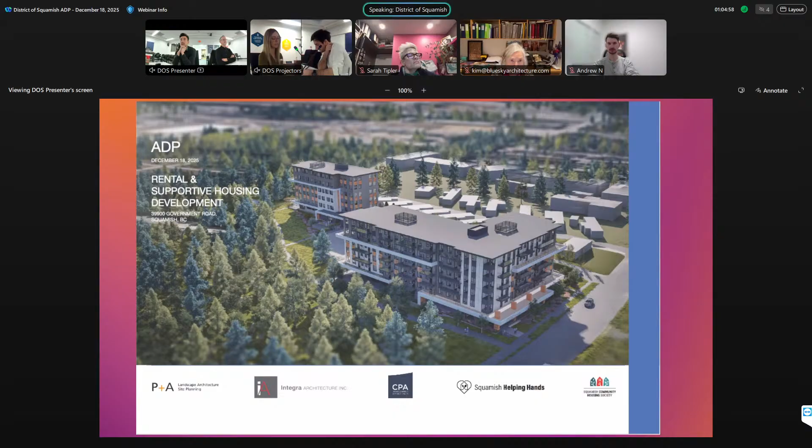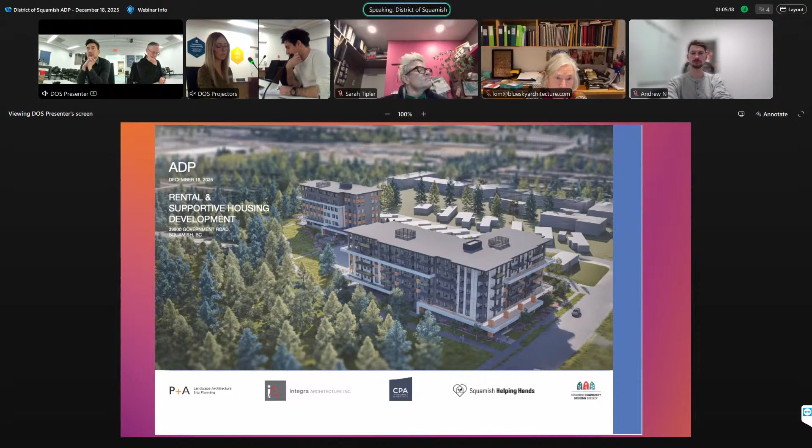The proposal is for two six-story buildings, including an affordable housing building to the north fronting Government Road, and a supportive housing building to the south fronting the future Pioneer Way Road extension. In the interim, a multi-use path is proposed along the eastern side of the development.

The supportive housing building is classified as institutional and is exempt from the form and character development permit requirements. However, the district encourages the applicant to apply relevant design guidelines where appropriate.

Staff are generally supportive of the proposal and are seeking ADP's feedback on building form and character and landscaping, with particular attention to pedestrian circulation and landscaping within the parking areas, also the southern elevation of the affordable housing building in anticipation of the future Pioneer Way extension.

Given the nature of this affordable and supportive housing project, staff asked the panel to consider costs in any design recommendations. This application qualifies for an expedited review process requiring only one ADP review, after which staff will work with the applicant to resolve any outstanding issues. With that, I'll turn it over to the architect team for their presentation.

Great, thank you Robyn. Good afternoon everyone. My name is Colin Trong, I'm principal architect at Integra Architecture. It's a privilege for me to present this project to everyone this afternoon. It's a wonderful project in our opinion.

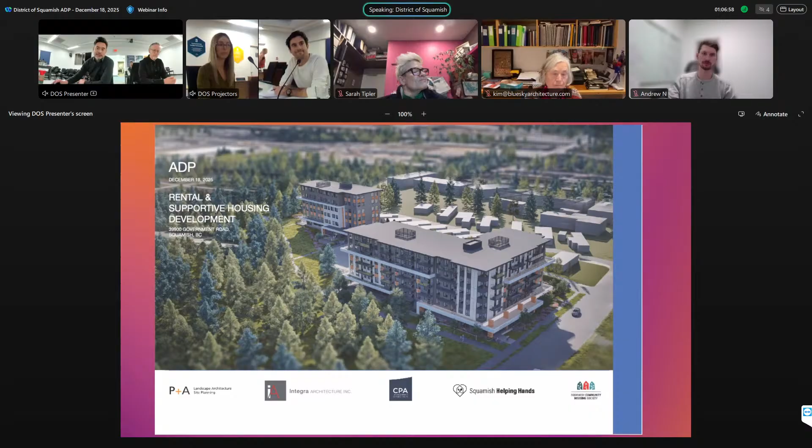I'd like to introduce our project team who's also here with us this afternoon. We have CPA development consultants. Lindsay Fraser is directly behind me as well to answer any questions on behalf of our housing partners, Squamish Helping Hands and Squamish Community Housing Society. And to my left is Michael Patterson from P+A Associates, our landscape architect, who I'll hand the presentation over to after we finish the architectural portion.

So this is our subject site here, highlighted in red. It's located within the North Yards neighborhood. This property will remain as district-owned land with BC Housing as the operator, as Robyn previously mentioned. The site is irregularly shaped and contains a decommissioned section of Highway 99 that runs north-south between Government Road and Pioneer Way.

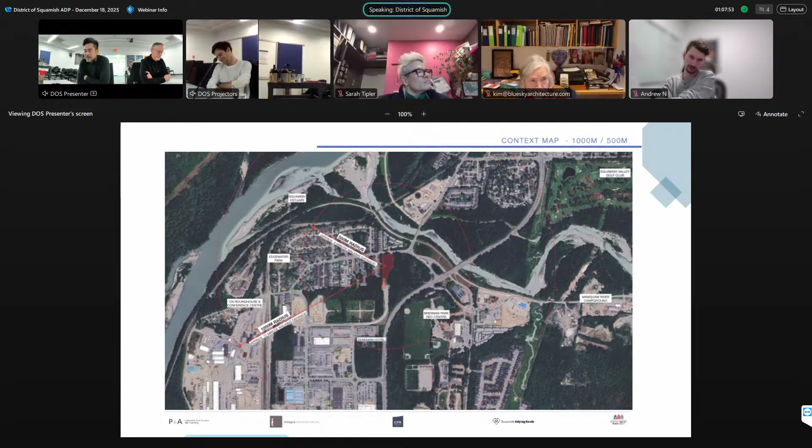The site is well connected with public transit and bike routes along Government Road and within walking distance of local businesses and recreational facilities. To the north, there are townhomes and single-family residences. On the west, there's a mobile home park. The east and south sides are undeveloped land.

Here are the street view images of the property along Government Road on the right-hand side.

Our development proposes the construction of two buildings. The affordable rental building is arranged in an L-shaped form at the northeast corner of the site, establishing a strong street presence, while the supportive housing building is located at the south end of the site and is accessed by a driveway off Government Road. Both buildings' siting has been determined by their programming requirements, also for optimization of solar exposure and to minimize flood risk impacts to neighboring properties.

95 surface parking spaces are provided at grade, including loading areas and service access. We have also highlighted the future road, Pioneer Way, on the right-hand side, which is subject to district acquisition from the Crown. Our understanding is this road will not be built in the foreseeable future, therefore it is not considered in the site planning concept. However, a multi-use path is proposed along the east side to provide a connection from the south end to Government Road.

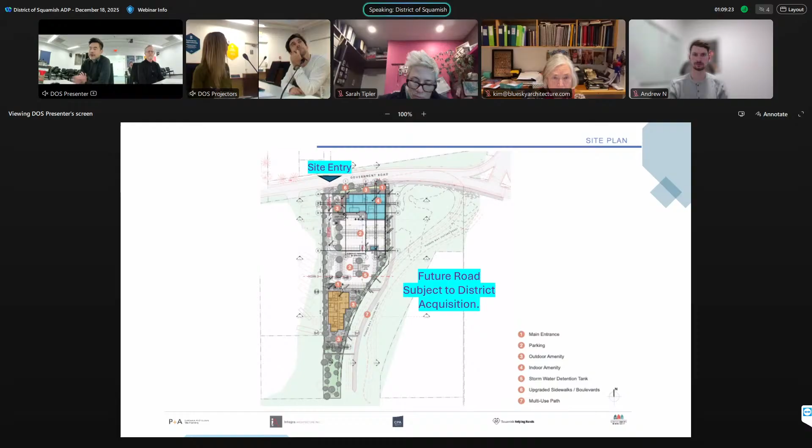These are the site challenges for this development. A flood hazard assessment report was required and completed. The development has been designed to maintain flood conveyance capacity and avoid increasing flood risk to adjacent or upstream properties. The minimum flood control level was established, and all building service rooms are located on the ground floor.

The site is also within the wildfire hazard area, which influenced our choice in non-combustible building materials and the implementation of a fire priority zone for landscaping to reduce wildfire risk, helping to protect people, property, and structures.

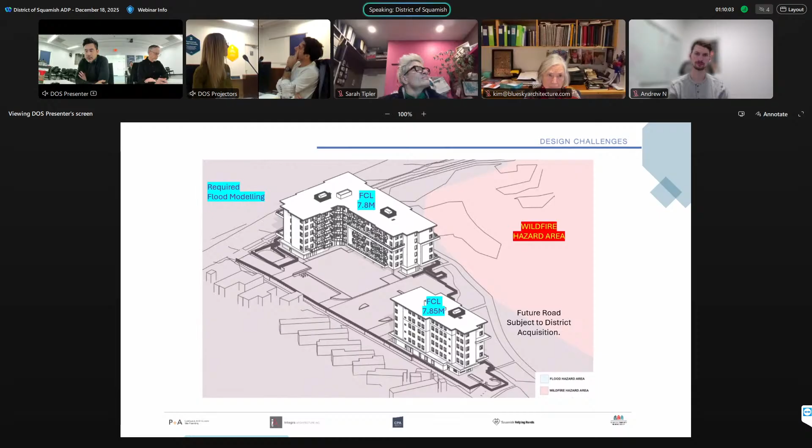At the north end of the site, the affordable housing building lobby is oriented towards Government Road. The interior amenity space is located adjacent to the main lobby and has direct access to the covered outdoor space. A path leads to the kids' play area on the left that provides further amenity space for residents.

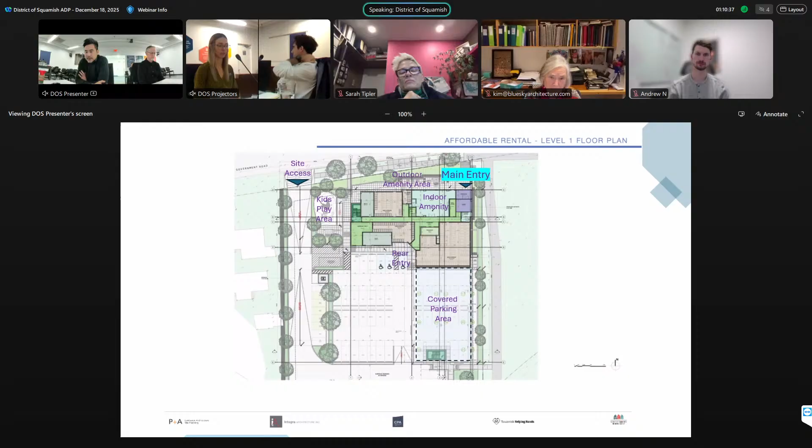A secondary building entry is provided on the south side of this building, providing access from the surface parking area. Accessible paths of travel are provided to the building from Government Road to the north and from the surface parking lot.

Residential units are located on levels 2 through 6 and are serviced by 2 central elevators. The L-shaped form of the building allows for ample natural light while maximizing the building's efficiency. Reducing undulations contributes to the building's envelope performance and energy targets.

Overall, there's 100 residences, 20 units per floor. 20 units, which is 20%, are adaptable, and 5 units, 5%, are fully accessible for the overall building.

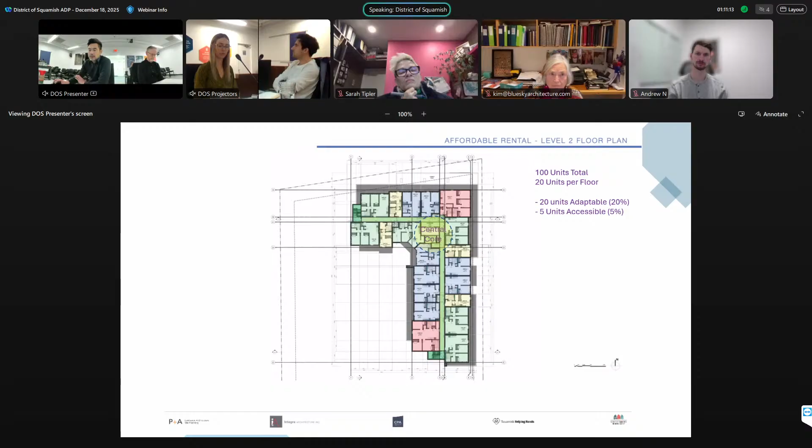Here are select examples of unit plans. All units are designed to meet BC housing standards, ensuring efficiency, livability, meeting adaptability and accessibility as required.

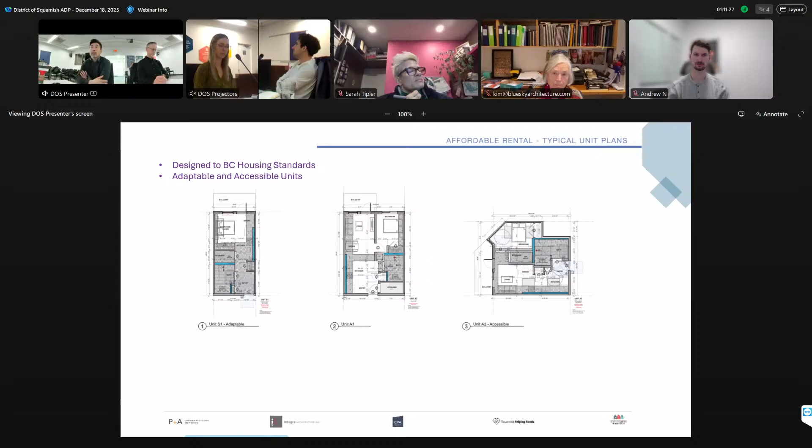At the south end of the site, the supportive housing building is oriented with its main entry facing north, towards a parking area. Program support spaces and services are provided throughout the main floor.

2 outdoor amenity areas are proposed. One is adjacent to the dining hall, which is the top right, and another south of the multi-purpose room, which is on the bottom side, provides an abundance of natural lighting and southern exposure with outdoor programs uses.

We have worked extensively with Helping Hands Society to determine programming requirements and meeting their objectives in conjunction with the support of BC Housing.

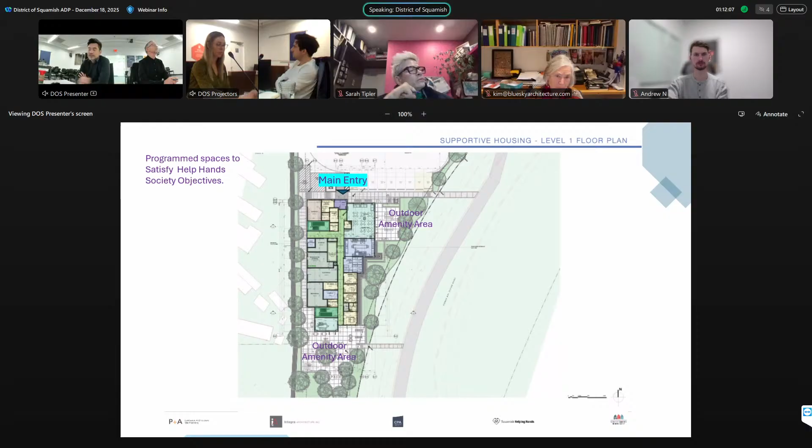The residential units are located on levels 2 through 6 and are wrapped around 2 central elevators. There are 65 residences in total, 13 units per floor, all designed to be 100% adaptable, and 2 units per floor will be fully accessible.

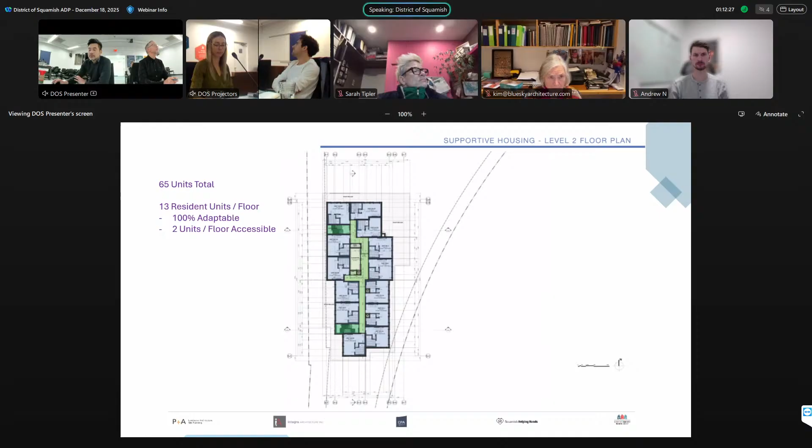Our development complies with the DPA3 by incorporating modern architectural design that harmonizes with the natural surroundings. These precedent images of existing buildings in Squamish provides us with the inspiration in the design of the proposed development.

Here you can see framed element features, the use of materials such as cementitious lap siding, cementitious panels, and corrugated metal siding provides visual interest and a varied building expression. Wood-looking materials provides warmth that harmonizes with its natural setting.

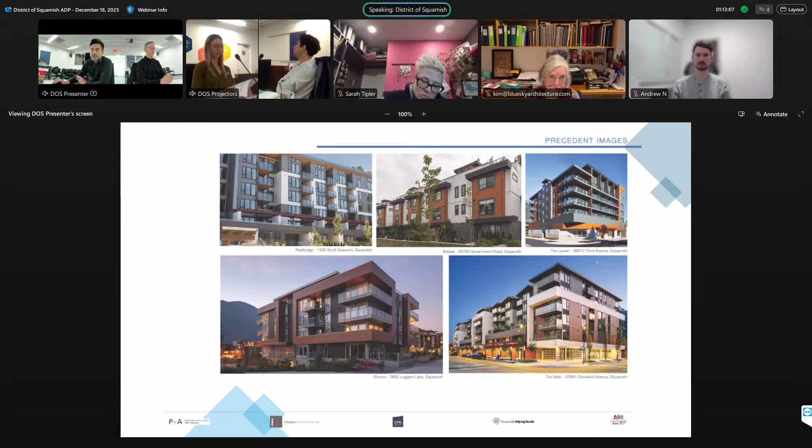The architectural design proposed is a contemporary architectural character that blends urban form with surrounding natural landscape. The design draws from both modern and West Coast influences, complementing the existing diversity of the streetscape.

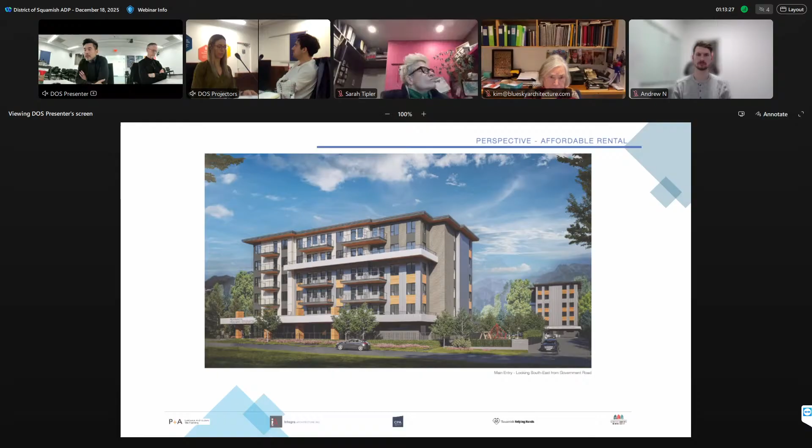The building massings are articulated through material variation and a contemporary color palette, accented by warm cedar wood look soffits and accents. Fiber cement panels and cedar wood look accents highlight the building's form, while generous glazing allows for ample natural light. These elements establish rhythm and visual interest across the facade.

Large roof overhangs with strong lines provide both weather protection and solar shading, while an extended canopy on the north facade emphasizes and anchors the main entrance.

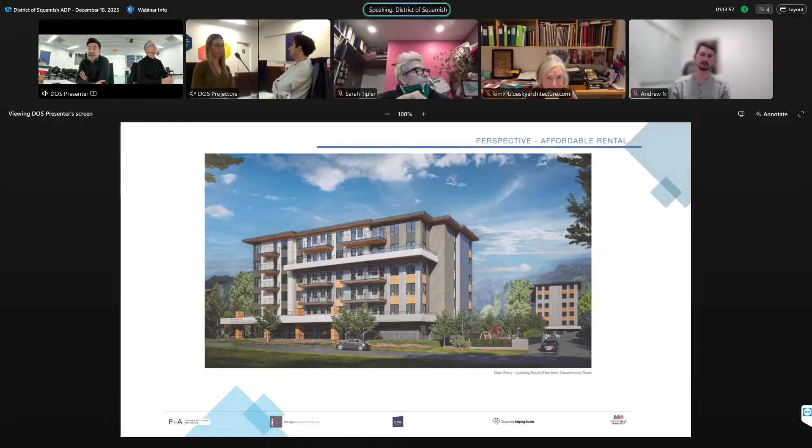The supportive housing design maintains a similar material and color palette. However, the different building form and the creative selection of materials and accent locations changes the feel and rhythm of the architectural expression, which gives this building its own identity.

Similarly, an extended canopy on the north facade creates a strong main entrance element.

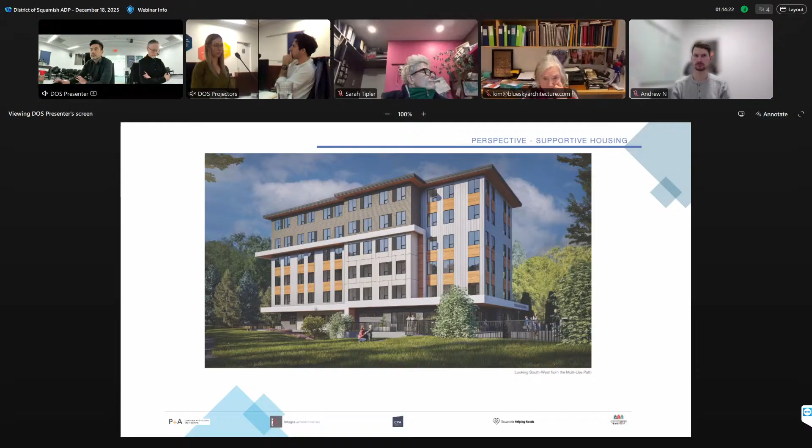The exterior building materials are high quality, durable, and non-combustible per the requirements for buildings located within a wildfire hazard area. Materials include fiber cement panels, siding with a wood look finish, brick masonry, and corrugated metal siding.

The building's massings are articulated through material variation and a contemporary color palette of white, grays, beige, black, and by warm cedar wood look soffits and accent panels. Elegant brick masonry provides a durable cladding material that distinguishes the ground floor.

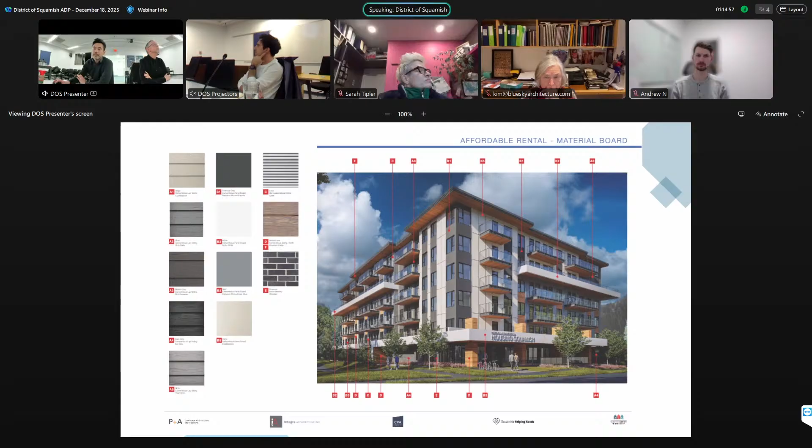The supportive housing exterior building materials proposed are similar to the affordable rental building to provide a homogeneous development.

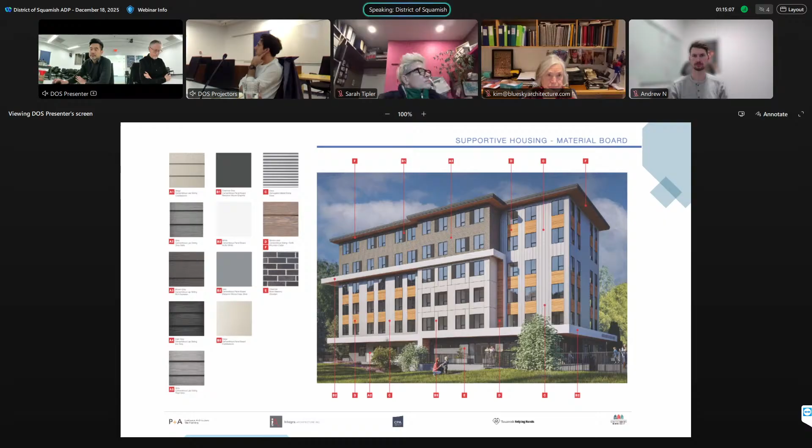The next few slides show the building's elevations. Though indicated flat as an image, at a human scale, buildings are not viewed directly flat or as an overall perception. These images present the building's massing, articulation, and material selections.

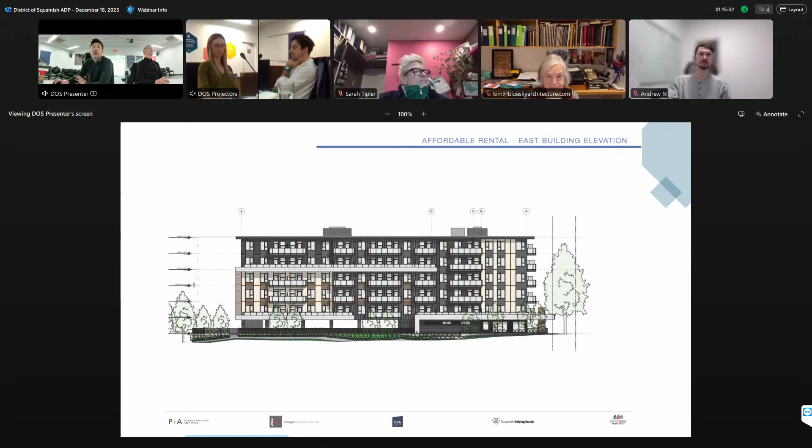This is the east elevation for the affordable rental building here. In the west elevation, this is the supportive housing east elevation. And this is the west elevation of the supportive housing.

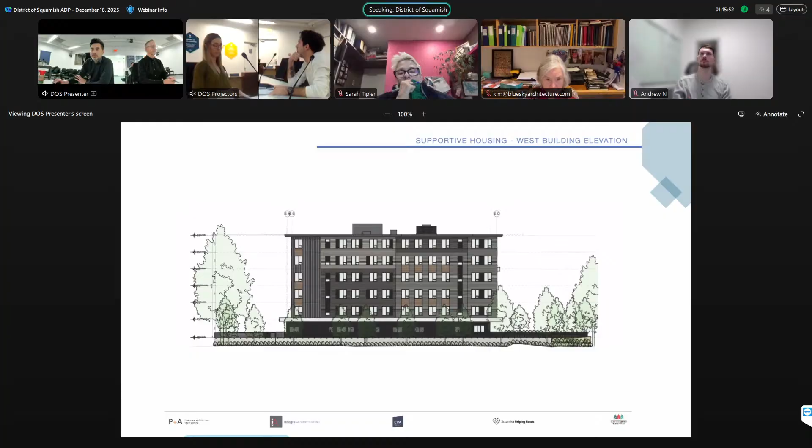Our development will be designed in accordance with the BC Energy Step Code Level 3 for the affordable rental building and Level 4 for the supportive housing. The ownership team is committed to designing, building, and operating buildings that provide healthy, comfortable living environments while being highly efficient in water use, reducing emissions, and minimizing environmental impacts.

Through the design process, we will optimize the building design to ensure energy efficiency. Sustainable strategies include high-performance envelope systems, recycled content of building materials, low VOC interior finishes, waste diversion, parking spaces pre-wired for EV charging, as well as high energy efficient appliances and fixtures will be considered.

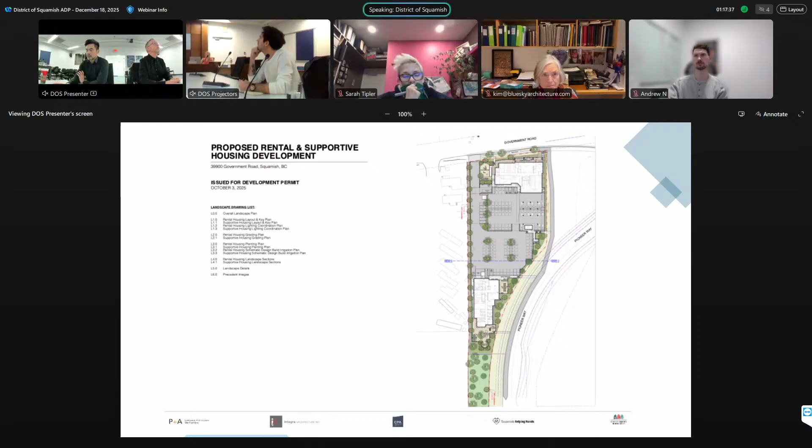Next slide. So as we focus on the affordable housing project, you can see that to the left is the vehicular entry to the parking area for both projects. The lobby entry is to the east, to the right, on the north side for the affordable housing.

We have a covered area of outdoor amenity landscape that is linked to the interior amenity landscape, and that access to the west to an area for kind of a communal area, both incorporating a children's play, but also a covered outdoor pavilion and a seating opportunity for parents or seniors to be outside and participate in a sort of group area.

We do have Class B parking provided that meets the requirements. And just to the south of the building on the east side, you can see that we've also provided a separate pavilion. The intent there is to have an outdoor space that would be separated from the building, a place where people could go and have a covered space in the landscape and would be able to smoke in that area.

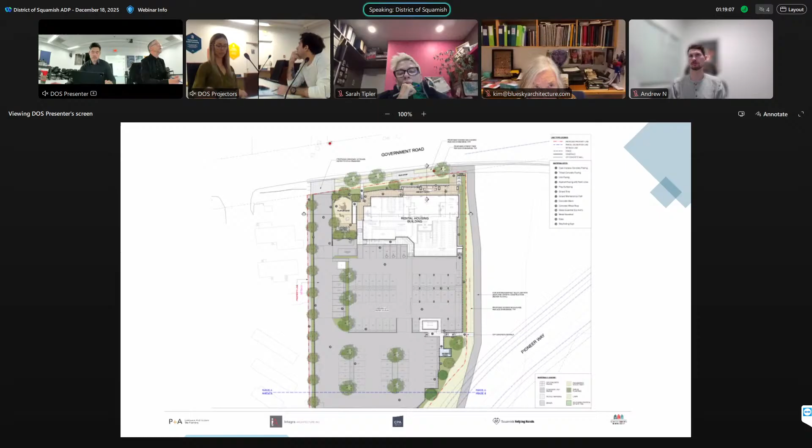The parking area, we have planted trees, and you can see along the west boundary that we have trees going down on the west side to provide a buffer and transition to the neighboring project. Next slide.

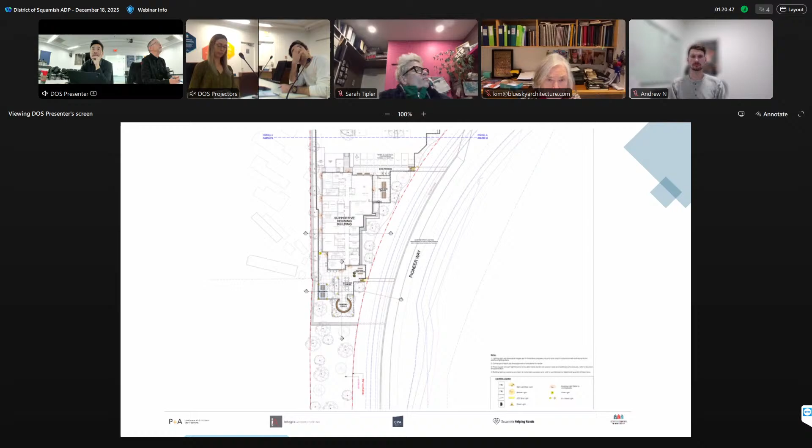Next slide. Similarly, on the supportive housing project, we have lighting to make sure that everything is secure and safe and visible for resident use for nighttime usage. Next slide, please.

The planting plan is part of the FireSmart area, so we've been working with the FireSmart principles to make sure we've got conifers more than the required distance away from the building. Primarily it's a deciduous landscape with broad-leafed evergreens. FireSmart is always a bit difficult to interpret with particular species, but I think we've done our best.

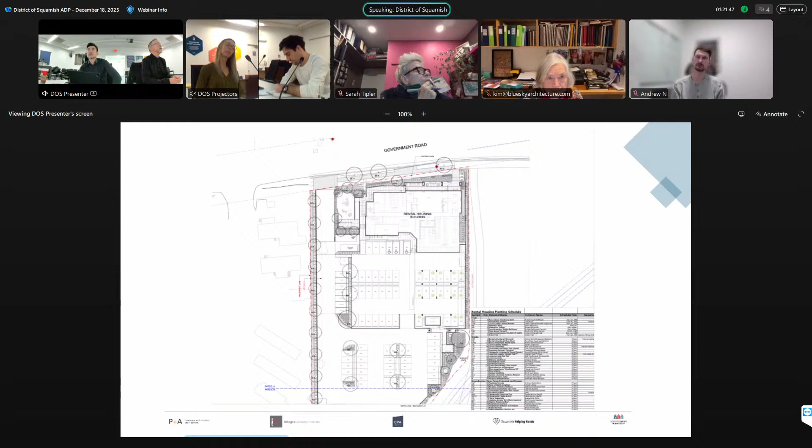It's fairly drought tolerant, and we will be providing an irrigation system for establishment and maintenance. We've tried to buffer the landscape around the buildings with a nice rich landscape cover, providing variety of seasonal interest and other aesthetic reasons.

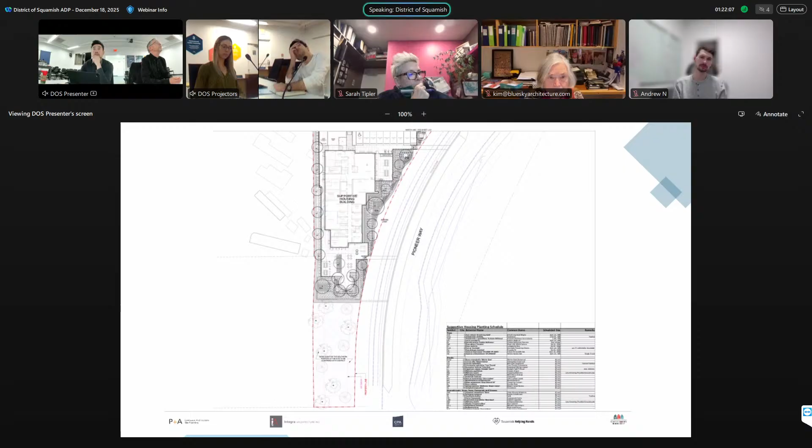Next slide. Similarly, for the supportive housing, you can see again that we've got a fair amount of planting landscape for people to look out on and to enclose the project. Next slide. This is just showing that we have irrigated the plan, so I won't spend much time, just wanted to bring this up to indicate that it is irrigated. Next slide is the supportive housing building, which again would be irrigated.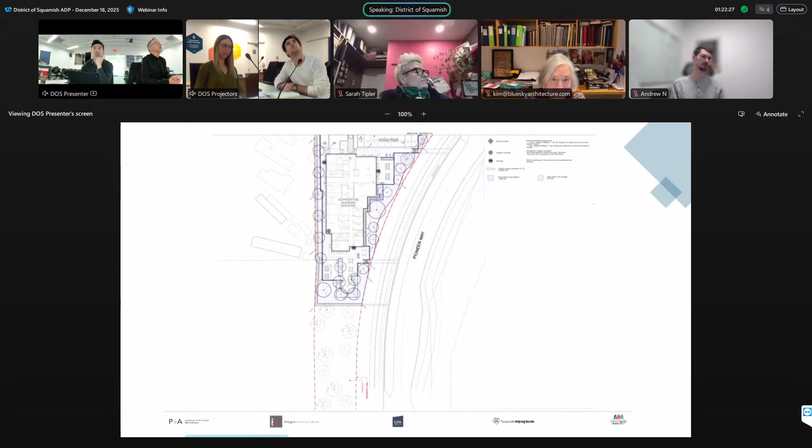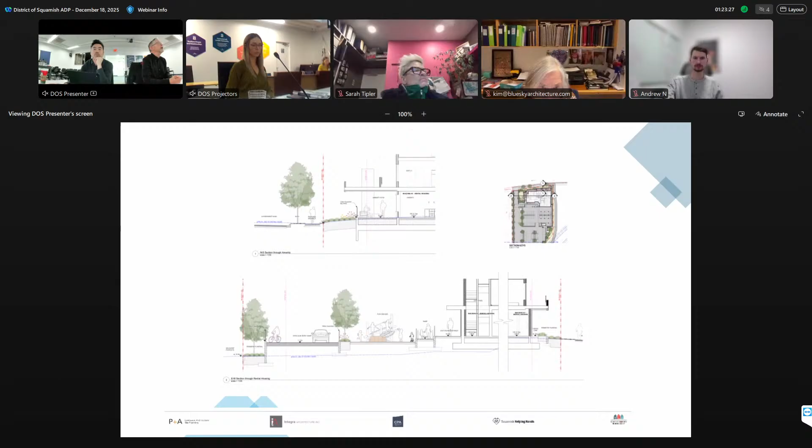Similarly, we have sections on the next slide for the supportive housing. I should point out the grading of the multi-use pathway, when we submitted the DP, we had just gotten confirmation, so the grading is close but probably still needs to be completed. I think these sections are very accurate though.

The top section there is through the supportive housing, east-west, and you can see the grade relationships to the multi-purpose path on the east and to the neighboring property to the west. You can see that we're elevated a bit from that, and also the buffered planting on each side.

The next slide is a little bit south, through the south amenity area, and you can see the covered amenity - go back one - you can see the covered amenity and how that space feels. Then the last slide is more of a north-south section through that exterior amenity.

Lastly, the images on the next page are sort of what we see this project looking like from a material point of view. We've got textured paving for the affordable housing project, and we're thinking cast concrete with score lines for the supportive housing - we wanted the pavement surface to be fairly even and consistent. We have outdoor dining and picnic tables, bike racks, seating, and covered seating under pavilions.

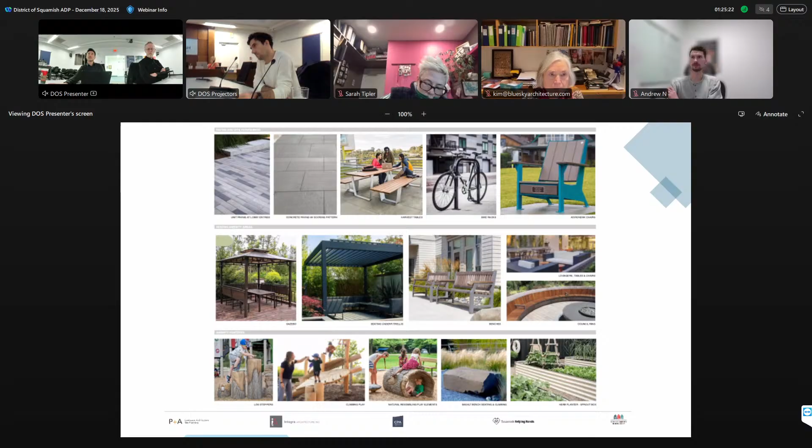Thank you for your presentation. Yeah.

I will take it online to our panel here for the first round of questions. I believe we've got Andrew, Michael, Sarah, Kim - is there anyone else that I've not seen online? Sorry, I can only see partial, just in case anyone joined. Okay, I'll start the questions off then with Andrew. Sorry, just one second, sorry Russell, I'm just looking - it looks like we may have lost Michael. No, I'm here. Okay, perfect. Great, never mind, sorry Michael was just hiding there. But yeah, over to you, Andrew.

Thanks Luke, I'm going to comment on public art. Looks like under section 3613J there's some conversation to include public art. Is there a plan to include any sort of public art with the project?

Could you guys hear that okay? Yeah, okay.

Do you want me to pull up here? Yeah. We'll show.

Hey everyone, my name is Lindsay. I'm working with CPA Development Consultants, and we're working with BC Housing/Helping Hands on the supportive project, and with Housing Squamish on the affordable rental.

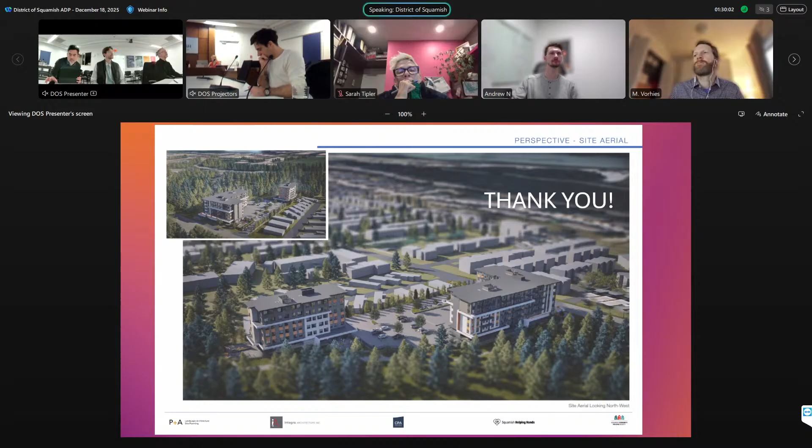The west wall along the property line, the neighboring property, I think currently in the plan we're sort of implying that it's a concrete wall, and I don't think that decision has yet been made. There's some costing that needs to be done to decide how that wall fits into the overall budget, and how best, also from a geotechnical point of view, that wall should be constructed.

We are planting in front of that wall. We've got a fairly constant rhythm of trees to provide a buffer at a higher level, and underneath that we have a variety of plants, which then brings up the need to maintain that area. So currently on the plans we are showing a maintenance path along that edge. There was quite a bit of discussion on how best to show that edge, and ultimately it felt important to be able to access it from the property, and that's why we put in that maintenance path there.

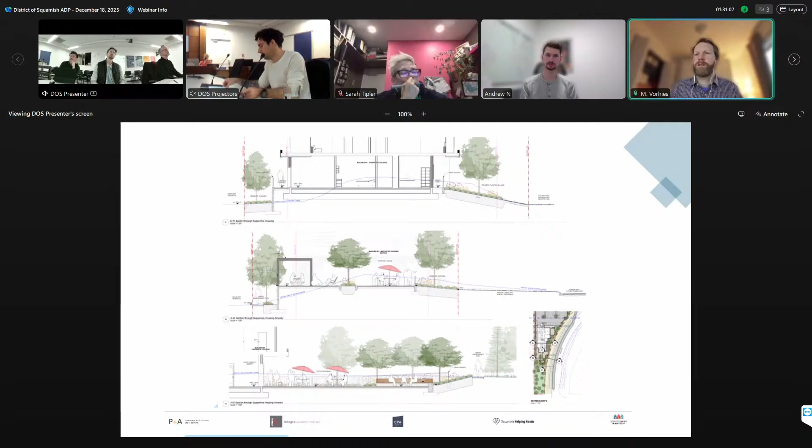And the maintenance path, I was noting that in the sections it shows up in some of the sections, but seemed like in other sections it did not, even though it was showing in the plan. Yeah, it's definitely shown on the plan, and if for some reason it's not shown on a section, it might be the particular view of the section, or maybe that's an error. But no, we are definitely planning to have that maintenance path up that west side.

Okay. I know there was some discussion in the report that Robyn provided back, that there was a little bit of apprehension about having the path there in terms of it looking perhaps like a public thoroughfare, which, we're just at a schematic design stage here, and we can take those comments back and ensure that the way it's implemented does not give that impression, and that it is properly barricaded and that sort of thing.

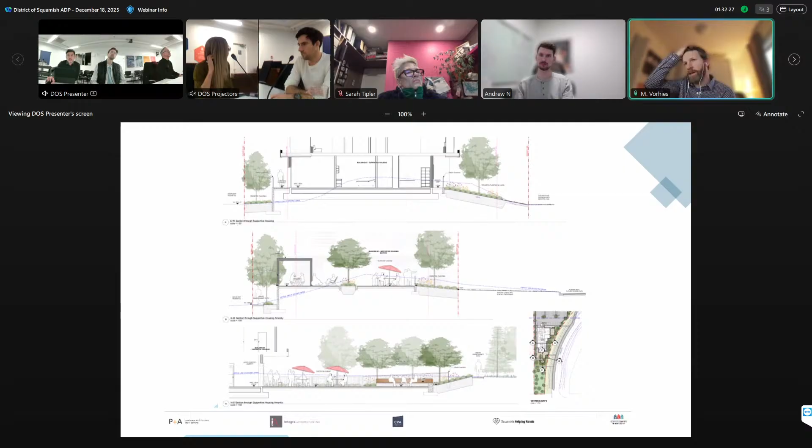This may be a question for the district, but where the future Pioneer Way road right-of-way is, I'm curious, the current design of that multi-use path, as the application stands right now, looks like that multi-use path is sort of in what would be the actual traveled lane of the road. I'm curious if there's any reason that this multi-use path should not be in its final location, or I'm just looking at how the access might be from the site down to the multi-use path, and making sure that that's going to be functional in the future condition as well. So I'm curious if I'm interpreting it wrong in terms of where Pioneer Way will be in the future, to its full extent.

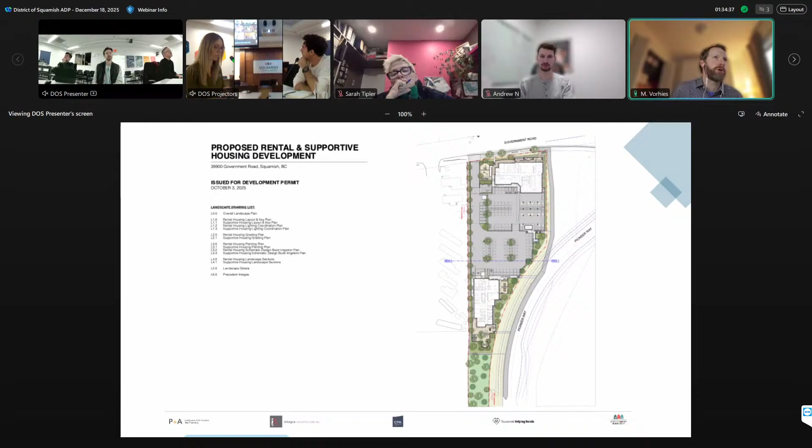So it's possible that where the proposed multi-use path is at the south of the site could be in the middle of the future road. The south portion of the multi-use path is in the alignment of the future Pioneer Way, while the north section is essentially in the middle of, or off to the side of, the development site. We did go to council with this design to get their buy-in, because typically we'd require a developer to construct the entire road. Twofold: one, we don't have that land agreement with the Crown, and second, this is a partnership project, and looking at the funds available, council agreed to waive a number of these off-site upgrades.

Thanks for that explanation. The other question I had is about the tree provision in the parking lot. I see there's a requirement or suggestion for a certain number of trees per parking stalls. Were more tree locations looked at, or is there a design constraint? Maybe it's the number of parking spaces required that's preventing more trees from being put into the parking area?

Yes, there are design constraints. Parking stalls, but also the access for loading and the turning radiuses that are required have really defined that parking lot. So we've worked to get trees where we can, but yes, we do have limitations we're working within.

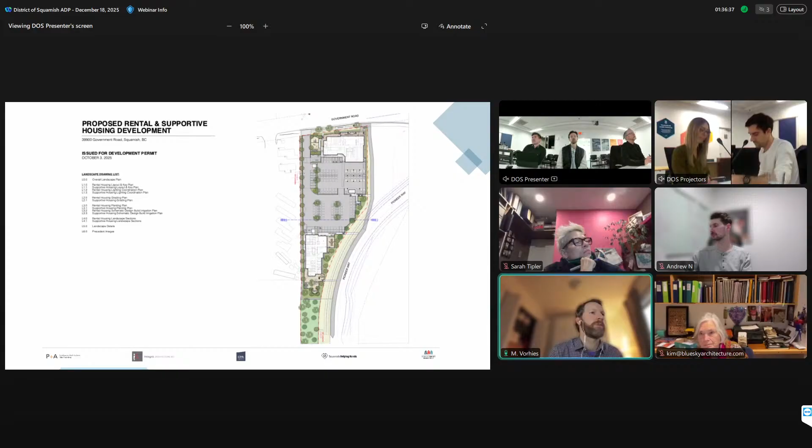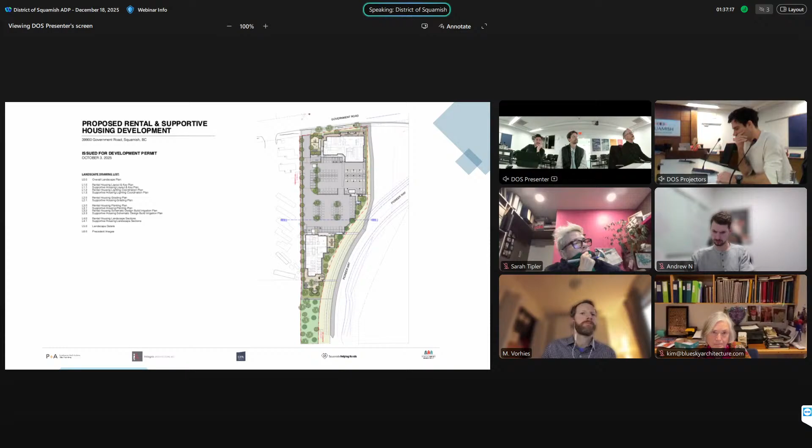In your decision of where trees were going, is there a minimum soil volume requirement you've been working to? I didn't see anything on the drawings indicating soil volumes. We typically do work to soil volumes for certain sizes of trees, and it's something we'll continue to work on. Some of the trees in tighter spots would probably need structural soil under the parking in order to give them the required soil volumes they need. It's an ongoing process, and due to the nature of this project—both affordable and supportive housing—there are costing considerations that are part of the decision. So you'd use structural soil or soil cells if required to get the soil volume for the trees—yeah.

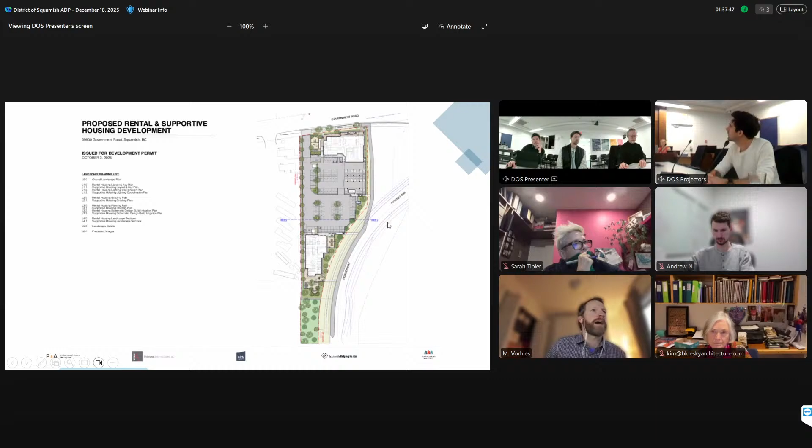This next question has to do with irrigation on Government Road. I know the property line comes across the boulevard and back boulevard space, not perfectly parallel with the sidewalk, and I'm wondering if there's a requirement for the development to provide irrigation to the boulevard trees and space—though that might be a district question. At the moment, we don't know. We're not even actually providing boulevard trees, so that's not shown on our drawings, and we're not anticipating providing irrigation, but it's no doubt part of the discussion as the project moves forward.

The last thing I'd like to hear about is the criteria for how you went about selecting the plant species for the project. Ideally, we would have loved to have had more conifers given the surrounding landscape, but fire smart requirements really limit the amount and location for those. So we've located a few where we can, further away from the buildings. On the west side, for that line of trees, we wanted to provide a line of trees with a fairly good sized canopy—so probably more of a medium tree than a large tree.

Choice of other trees is really, again, to provide interest. We like to provide interest through the seasons for deciduous trees, and the same for plant material. If we can provide native species, that's what we do as well. But we're really trying to work within the fire smart guidelines, and also being somewhat cognizant of bear requirements. It's always a bit of a balance of those things.

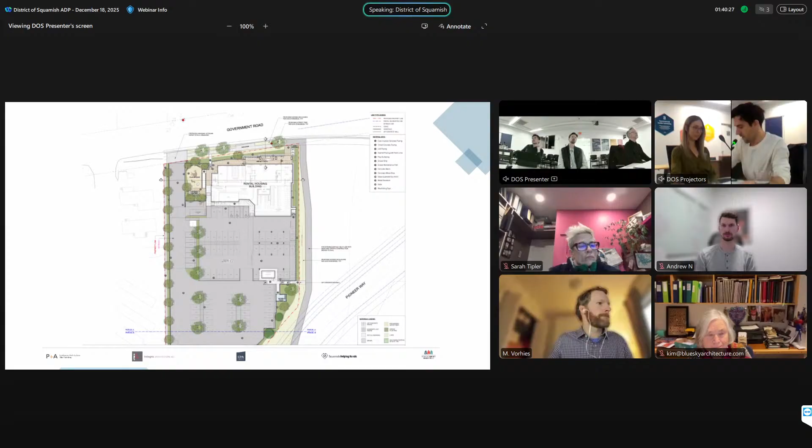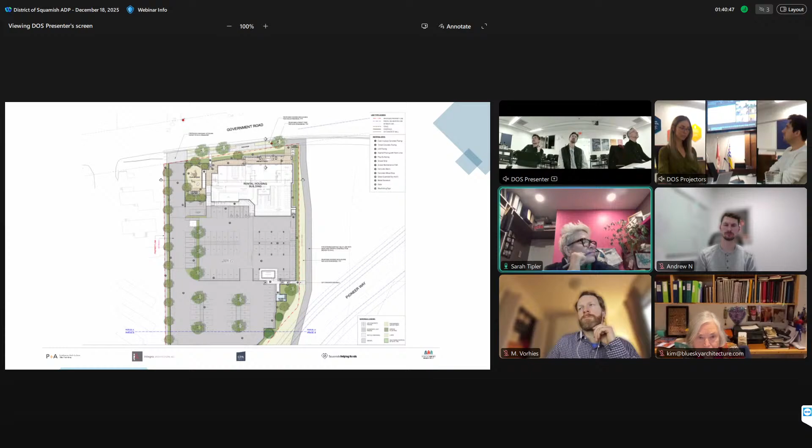Sarah, questions from you, please? Sure, thank you for the presentation. I've got a few questions. First of all, I think it might just be your symbology, but can you describe the grade changes around the rental housing building? It seems that it goes down and then up, and then these curb cuts and ramps that seem to be textured. Can you just explain that to me?

Yes, so the project is set higher than the existing landscape due to floodplain requirements, particularly for the affordable housing project to the north. We needed to balance the landscape, building it up to buffer the building against flooding requirements we needed to meet. So we were trying to keep the landscape at the existing grade around the perimeter of the site as much as possible, and that's why we opted to slope down to the play area, so that grade is lower than the building. But it also provides a little bit of variety and interest in the landscape, I think, as well, just mitigating the transition between the building, which is set up a bit higher, and the sidewalk. So we have people recreating on site that are a little bit closer to the sidewalk elevation. I think that's just good urban design for good connectivity and overlook.

We are set up so that in that bottom section, if you look at the left-hand side of that section, or the west side, you can see the relationship of the project to the adjacent site. So there is a grade change there, there will be a retaining wall, it will have a guardrail, and we do have planting there to buffer that transition. But it is set up, and that's fairly consistent along the project, that relationship. On the east side, on the lower section, you can see that we slope out from the building at a fairly gentle slope in this particular location where the section is taken. So generally, we're always higher than the surrounding.

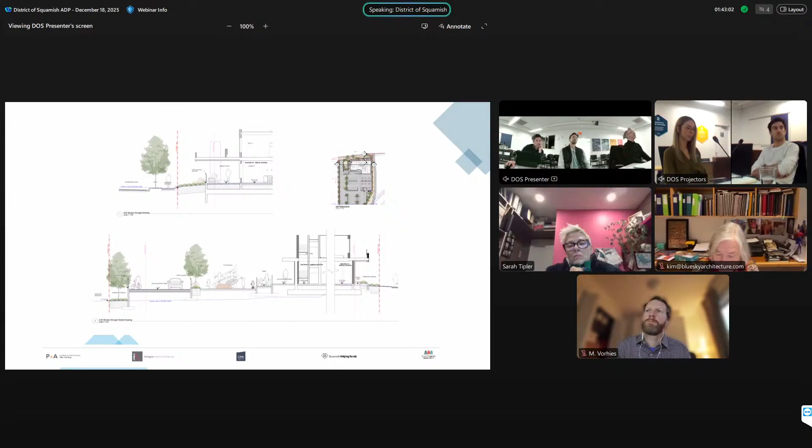The one exception would be, if you flip to the next slide, the south side of the supportive housing project. There on the bottom section, you can see that where we have that circular seating node, we slope up to the landscape, because the landscape kind of berms up in that little area to the south of the project. But that's really the only place where we are nestled into the grade. Everywhere else we're above the existing grade.

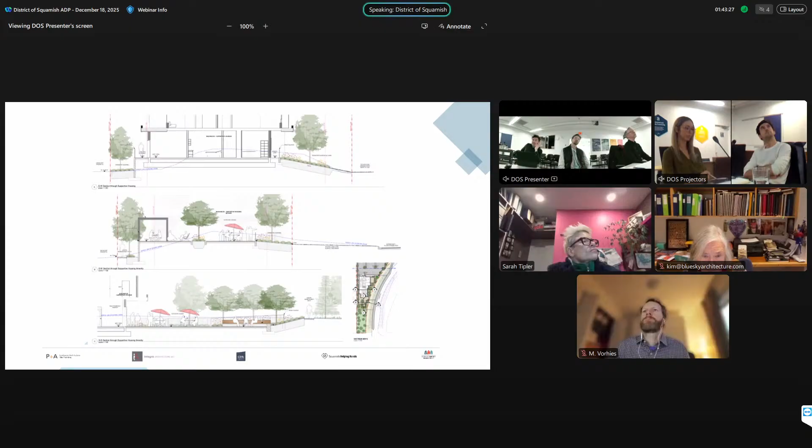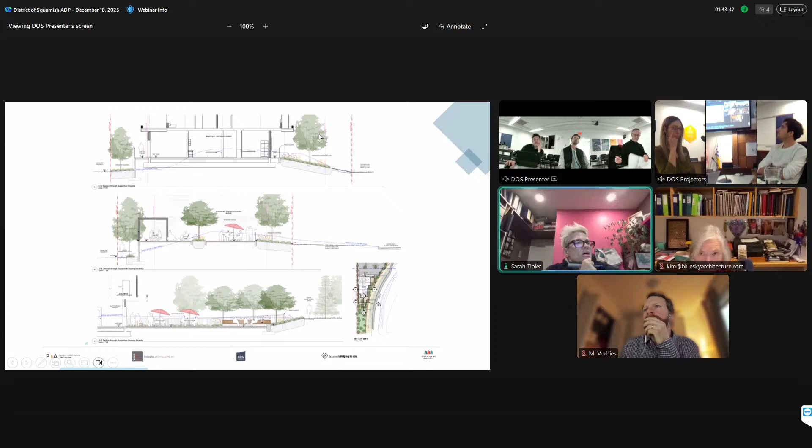Okay, and then I see that in the rental housing building there's scooter parking on the main level. So are you implying that somebody who uses a scooter wouldn't be able to take it to their unit? Yeah, there's some scooter parking in the affordable rental. I think it would depend on the individual and what their needs were—if they were living in an accessible unit, or they just used a scooter to get around. We had a little bit of space left over on that main floor, so we thought a small scooter parking area would be helpful for people.

Yeah, in the past there have been projects in Squamish where people are having to park their mobility devices down on the main floor and then walk around a building and up elevators and down hallways. The whole point of having the mobility device is actually to help them ambulate, so that's just something to be cognizant of.

Can you explain why there's not an access aisle as well? There are 3 accessible parking spaces in front of the rental housing building, but there's only 1 access aisle. Is that the intent? I think that was also raised in the planning comments, so it's maybe just an error. Yeah, sorry, that definitely is an error, and we will adjust the parking space to allow for the accessible clearance on the side of the parking space.

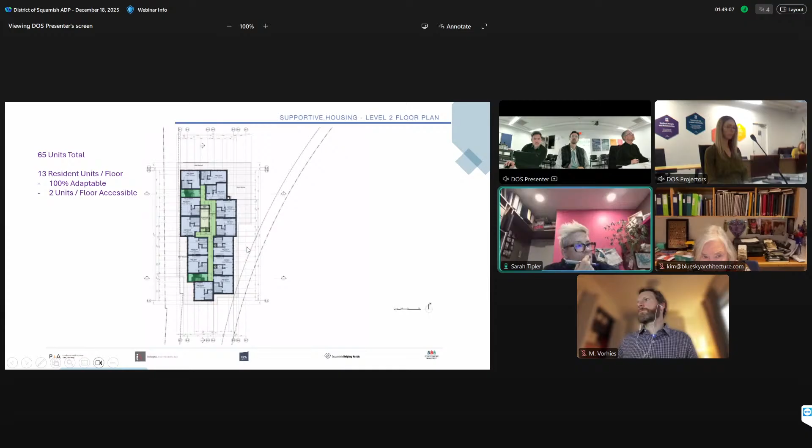And then finally, within the supportive housing units, it seems that the scooter parking and bicycle parking is shared. I'm just curious whether there is sufficient space for bicycles for people in the supportive housing building, given they may or may not have vehicles, but a bicycle might be more accessible to them. It just seemed quite small relative to what was available in the rental building.

Yes, you're correct. The original design allowed for a much larger space for bicycle and scooter storage. However, working with BC Housing, we had to hit an efficiency target - we were really under target based on their criteria and calculations. To ensure the project was viable, we had to shrink down a lot of spaces, and this is one of the sacrifices that had to be made, which is why this bicycle and scooter storage is small.

There was exploration of having an external standalone bike shelter. However, due to site constraints and issues around security, and being a further distance away from the main entry or the building itself, it poses issues for the supportive housing residents. So the resultant, as I mentioned, is we end up with a space of this size.

And then finally, in both the supportive housing and I believe by the rental housing building, there are picnic tables. I'm just curious if any of them are accessible, if they have an extended top that you could wheel under. A great question - I don't think they are, and I think they should be. So that's something we can easily change.

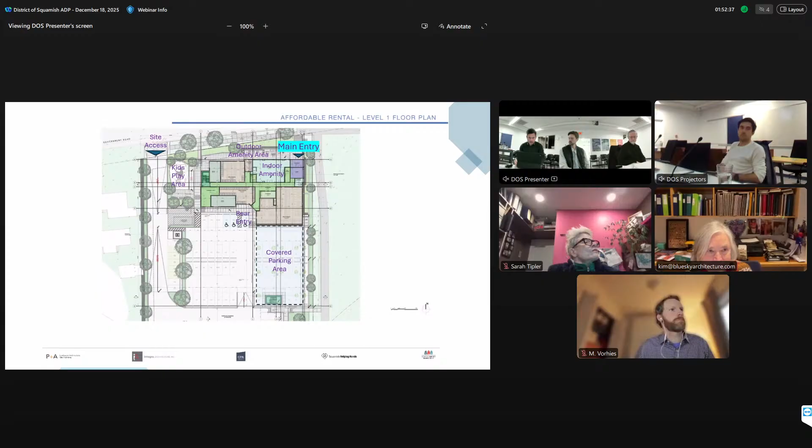Just one moment. So in regards to the bike storage space on the north side, there is a door that leads to the exterior, so they do have exterior access to that bike storage room. Similarly, the bike storage room on the south side has an exterior door as well, and there's also an exterior door for the bike storage room in the lower right-hand corner.

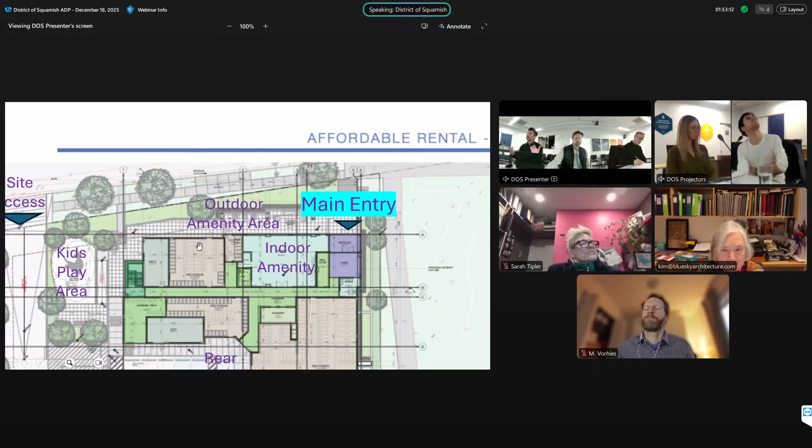The intent is we don't want people bringing bikes through common spaces because it could be muddy, wet, dirty, etc. But we do have a convenience door within the corridor to allow people access, so they can come down the elevators, go down the corridors, access the bike storage rooms, grab their bike, and leave through the exterior doors. So there is provision provided there, and then they go out that door and by the main entrance onto the road.

Is that the intention, the path of travel? That's right. They can go left or right once they leave that room, either past the main entry or past the kids' play area.

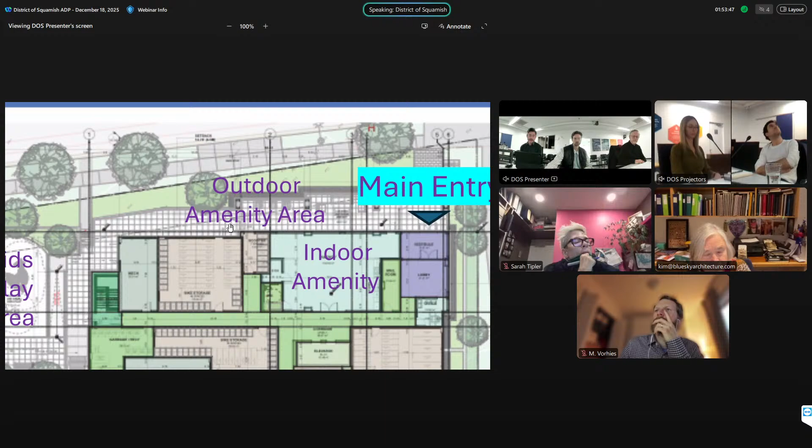And is the number of bike spaces a requirement that you have? Yes, it's a very high requirement, but we're hitting the zoning requirements for bike spaces. And the bike spaces, is there just no storage for other things for people, no storage lockers or anything? The bike storage is just bike storage, is that correct? That's correct. We have designed the units to have some in-suite storage, so they do have storage separate from the bicycle storage.

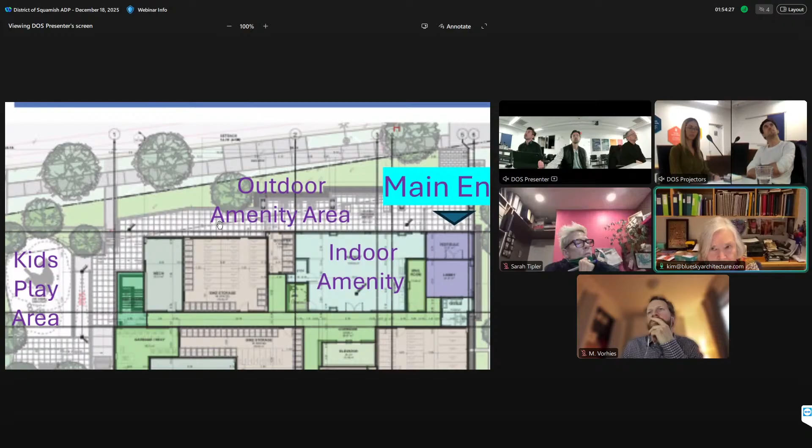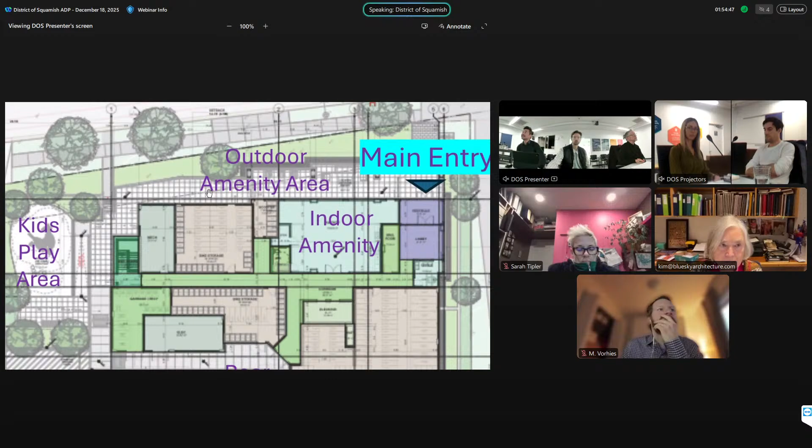Another question I had was, are you going to have charging stations in the parking areas? We will be, we have some provision for EV charging. I think they're identified on the surface parking plans, which is undercover, so they'll be protected, and there will be provision for EV charging.

That's really all I had in questions that haven't been asked. Thanks, thanks Kim. Just back to you Sarah, you've got your hand up there. Yeah, on that same note, is there going to be for e-bikes, will there be charging within the bike storages?

For the affordable housing, there wasn't a wish from the housing partner to provide any. We have provided some for the supportive housing, but not for the rental housing building. So if the housing partner has requests based on the needs for their development, then yes, we can provide provision for it.

Yeah, I think it is something that we would implement. It's just not been one of our top conversations thus far, but given that so many people utilize e-bikes these days, we'll be sure to include some electrical, probably in all of them, I would imagine, but we'll take that back for sure. Great, thank you.

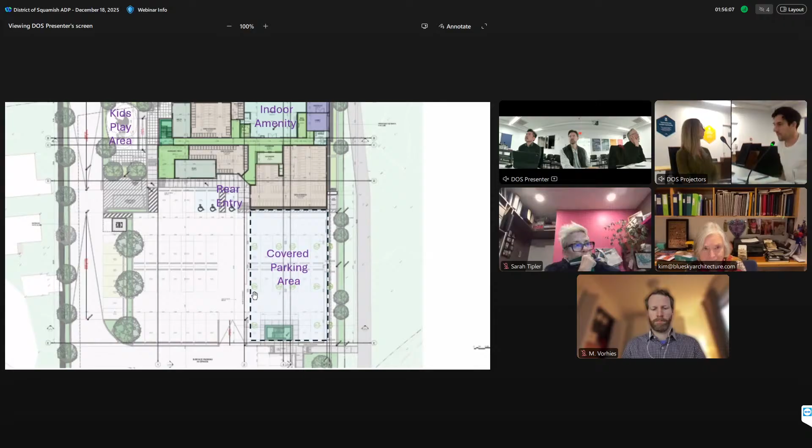Thanks Sarah, I think I'm the last one, so thanks for the presentation. My first question is just a quick one for staff, just to clarify this future extension of Pioneer Road. Understanding that it's somewhat unclear, but is it just going to be a typical road section of like a 20-meter right of way, anticipated to be two road widths and a bike lane?

Yeah, just a typical standard road width, I think. There's a bike lane, sidewalks, boulevard, landscaping, pretty typical. Okay, and is it intended in the future that the multi-use path become integrated with that road right of way?

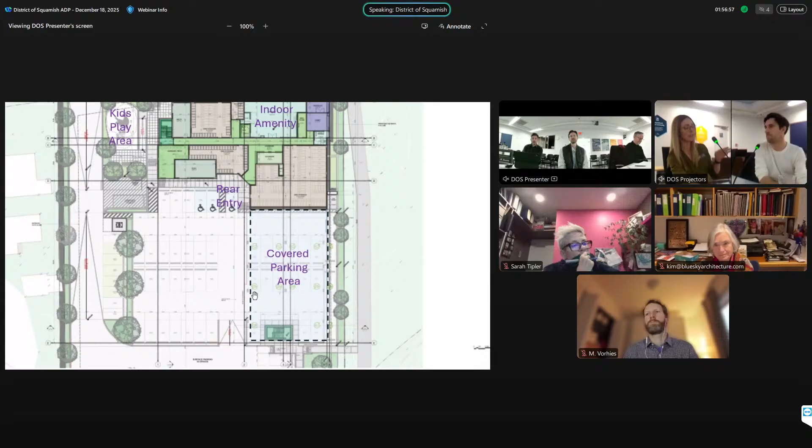I think so. I think the multi-use path, the plan is to have on the north side a multi-use path kind of meandering up around.

I'm just trying to contextualize my question here, because it's mostly around how the building interacts with this future road right of way. I acknowledge that's probably a really hard thing to design for, a future uncertainty. But I'd like to know what thought has been put into that, especially in the south building, and how that building will have frontage onto that future road. How have you arranged those spaces to have that direct connection, to understand that public private interface?

There was the assumption that the road would be part of the development in an early phase. We did a feasibility study allowing for two buildings originally on the north end, and the supportive housing on the south end, knowing that future road Pioneer Way would be developed at the same time as the project. We reviewed access to the site through the middle portion as well of Pioneer Way, but engineering did not approve that because of the amount of traffic and congestion along Pioneer Way. So working with our civil consultants and the district, we understood there's so much uncertainty around the orientation of the road and how it connects through to the northern portion.

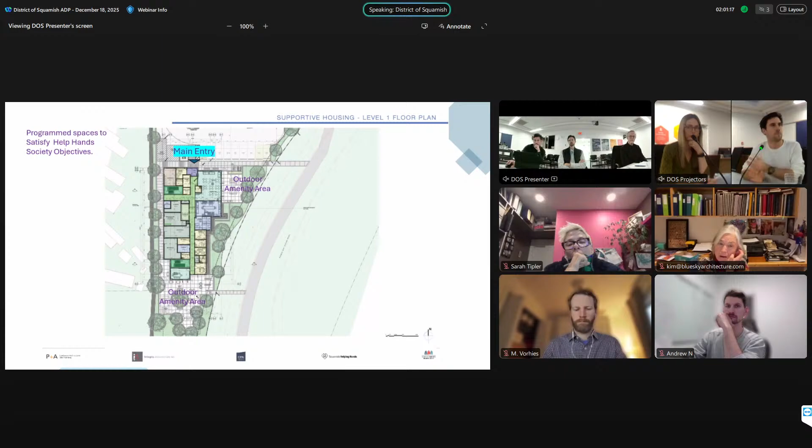And then I guess my same question was for the north building to the east side - that's going to become a property line, which potentially there could be another building just like it to the east. What consideration was there for that future change in the design of that elevation, and the look and feel of it?

So similarly on the ground floor, it's mostly bike storage spaces, service rooms, etc. In terms of separation or privacy, the units are level 2 and above. We've designed it so that it is an attractive facade frontage along Government Road.

Because we don't know what's going to happen there in terms of what future development may look like, the intent is to design the building and keep it attractive, considering that Government Road may cut through or whatever, how that orientation may be in the future. Similar treatment, it is bermed up, so we have a little bit of natural buffering there as well, and there's some landscaping treatment along that edge to give a softer edge.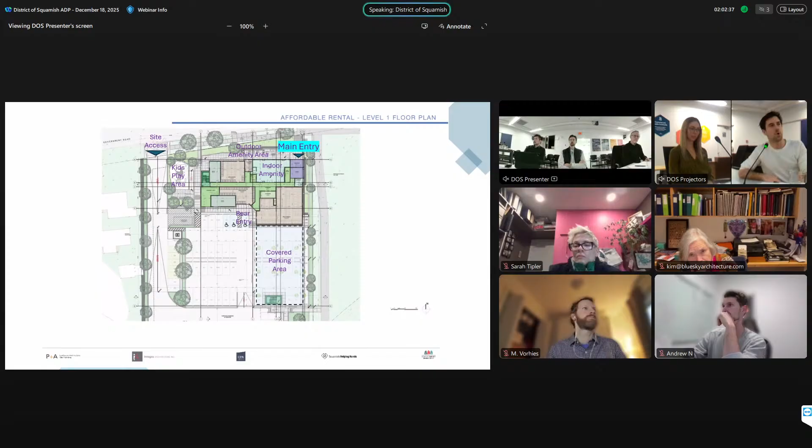I'll just move on to site access. I see that the main point of access is on the northwest side, bringing it all the way down the west side. Was there any consideration or what mitigation have you got for traffic calming measures, in terms of keeping people slow through that, given that it's designed as a straight shot?

Just through the driveway portion? Yeah, I'm wondering, because it's coming out, you got the site access, you're passing the kids' play area, and then you pass through a loading zone and into the parking. I just worry that, has there been any thought about how fast people might be moving through there?

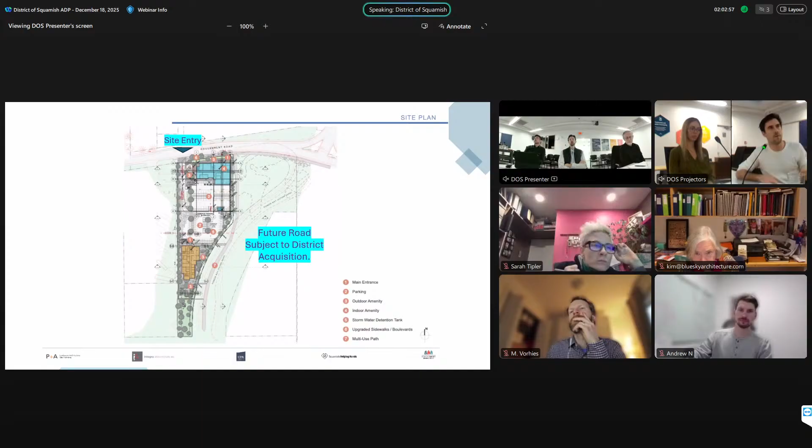There are definitely strategies that can apply there through signage and speed bumps. I don't know, Michael, if there's anything from a landscape perspective that can be considered. Well, as you come up the ramp, we do have a wayfinding sign, because we're thinking that people visiting the site will come in, they're not sure which building is which, so they need the directional signage. But it's a good question, and I think it's something we should think about.

How do we slow people down as they move, particularly as they enter the site? There, you are coming from a ramp up, and then you kind of hit a level parking, so there is a change that occurs there that would probably slow traffic. Yeah, it's not really something I had thought would happen, but it's something worth putting thought to. Any suggestions? I can give you some suggestions in comments if you want. Yeah, sure.

And then, I think I just missed this one, but you mentioned it, so I would like to talk about it: the garbage and loading strategy on both buildings. Could you just walk us through how you're planning people circulating around the site? Because I acknowledge that's a really tricky one.

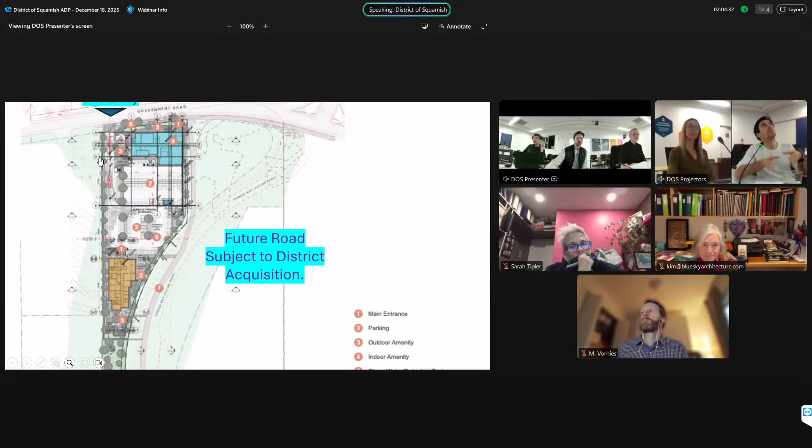Do you want to talk to us? So for the north building, I think the garbage area - you're asking about the garbage and loading? And how, yeah, I guess like if people are coming to pick up the waste from the north or the south building, we could just do that one, or loading or drop off as well.

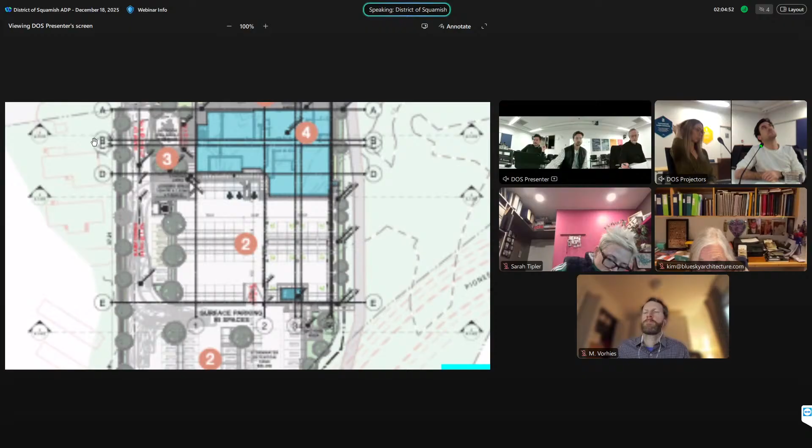The loading area for the affordable housing is, as you come up the ramp, there's a spot there for the garbage staging. The garbage is contained in the building, will come out. We've got curb drops there so that you can come out, this area here. Is there a better image to pull up? Landscape, good idea.

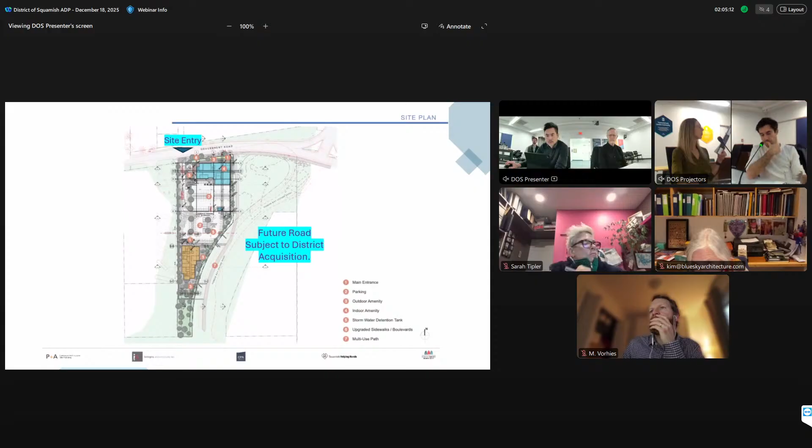So we can do this as quickly as possible. Apologies, sorry, I'm asking complicated questions. No, they're great questions, Steve.

Is there a higher res site plan? Yeah, I'm looking for the higher res site plan. A2 in 110 in architectural is much better. Thank you, Kim. Apologies, it's not cooperating right now. That's okay. We can move on, we'll do our best with another one here while you're doing it, it's fine.

Most of my other ones I'll leave for comments. I just wanted to ask about the materials and the color palette, what thoughts, how you arrived at that particular color palette, and whether there's any consideration for more vibrant colors.

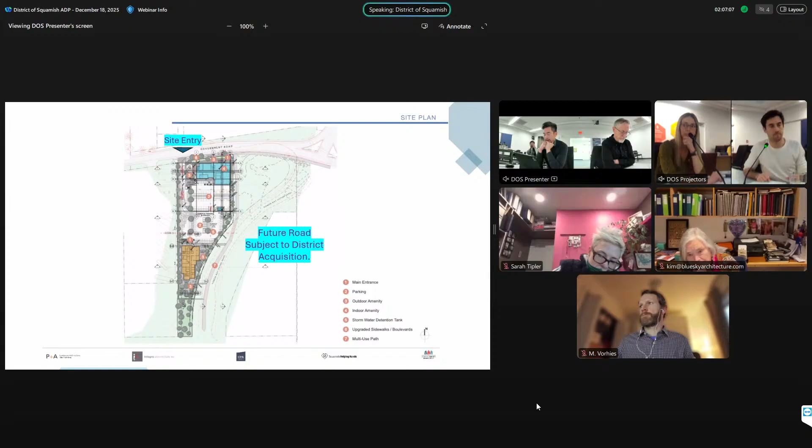In terms of color selection, we want to paint something that's natural and complements the natural setting. It's a selection of beige and grays and blacks and so forth. It helps us to keep it more neutral, more natural colors than having oranges and yellows and other colors on the buildings.

I think the building itself with the color selection represents itself in terms of the building massing and form. I find that when we use too many colors that really stand out, we definitely have challenges with the building's massing form, considering it is a 6-story building. Those familiar with the architectural characters and design that we do as an office in Integra know our buildings tend to fit very well with natural surroundings without being overly contentious, especially with the building's massing.

It's very personal and subjective, but especially with lower building forms and smaller masses, you can play a lot more with colors, especially buildings of this size. You want to select colors that are more natural, but allow other materials and finishes to accentuate the building and give it more architectural expression. I think we've introduced quite a bit of color here, but overall it fits well within its natural setting without popping out, especially given the sensitivities around the lower building forms in this neighborhood.

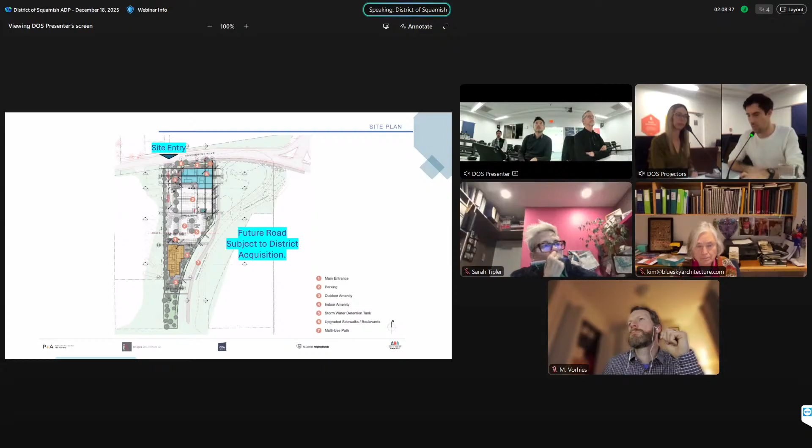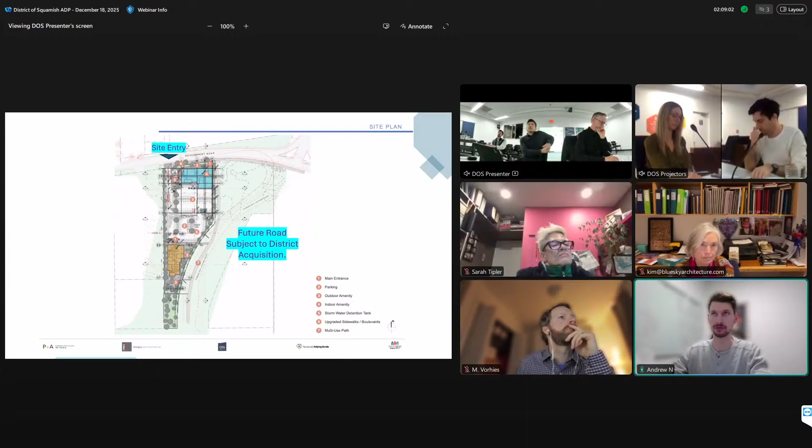I'll keep my comments centered around public art. My comments would be to work out some public art features together with staff. I think there are several options. There was a mural noted on the southern elevation of building A1 as an option. There are several other options available under the public art policy, including unique landscape elements, freestanding or supported sculptures, or other types of art installations. Given that this is a district project, I think it has the opportunity to be a model project for the DPA guidelines set forth. I'll leave my comments at that.